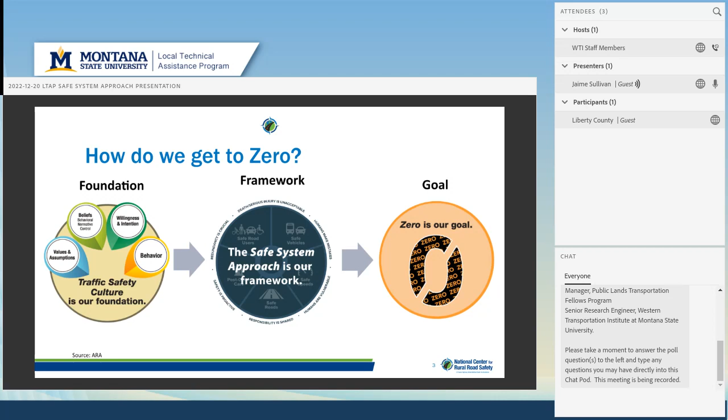In our case, the island would be our goal of zero. And our sailboat is going to be the safe system approach. That's how we're going to get there. But we can't do it without wind. And that wind is our traffic safety culture, and really making sure that we work on that as well. And so we'll go through each of these pieces.

And why is it important, and why have we been hearing this term safe system approach more recently? Well, this is because it's been done for quite a while internationally. And they're really finding that this approach is working, and it's helping international countries go towards that goal of zero. And so it's something that the United States has started to implement as well, knowing that it's working, and it's something that can help us get to our goal of zero.

We found that in January of 2022, this National Roadway Safety Strategy was released by the US DOT, and they talk about this crisis on our roadways and how it's unacceptable and preventable, and we really need to reach that goal of zero long term.

And so it also talks about US DOT's top priority being safety. And again, how they believe this should be done is through adopting the safe system approach. And so if you're interested, you can find this National Roadway Safety Strategy online. The very end of my webinar presentation will have a link for where you can find this. But you can read more there about what US DOT is doing to try and reach this goal of zero and use the safe system approach.

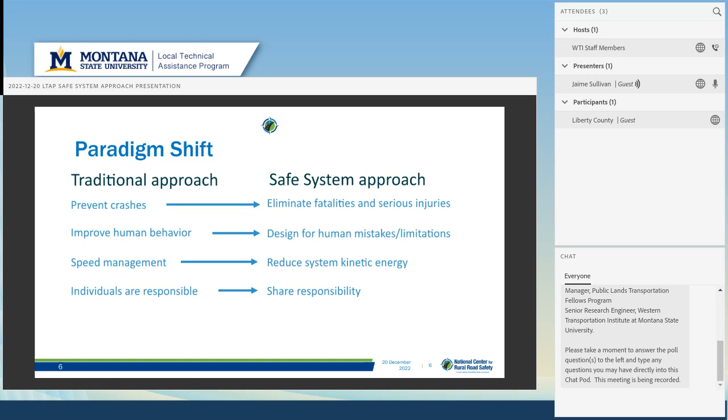Instead of trying to improve human behavior, now we're going to design for those human mistakes and limitations that I talked about. And we're going to talk a little bit about some of these human mistakes that occur and how we can do that. Instead of traditionally doing only speed management, now we're looking at how to reduce system kinetic energy. And we'll talk about what the definition of kinetic energy is and how that's different from just looking at speed. We used to say individuals were responsible for the crashes that were occurring in the traditional approach. And now we know it's really a shared responsibility. There's things that all of us can do to help prevent these fatalities, not just a driver.

And then we also used to look more at high crash locations and reactively applying countermeasures. And now we want to look at these proactively and really do a systemic approach where we know that if there's a particular location that has certain risk features, and another location in our county or area has those as well, it's just a matter of time before a crash is likely to occur at that one as well. And so we need to systemically apply these countermeasures.

Perhaps it's a horizontal curve where you have several of them in your county that look identical and crashes have only occurred at one of them. When you're putting countermeasures in there to make that curve safer, you want to do it at the other ones that look identical to it as well and have those same risk features to proactively make sure that no crash is going to occur there.

And then traditionally, we've really looked at transportation as the key to move efficiently. We wanted to get people as fast as we could from point A to point B. We wanted to move goods and services. And now in the safe system approach, we really want to look at it as safe mobility. So we do want people to be able to move between point A and point B, but we want to make sure that they're doing that in a safe manner versus really looking at efficiencies only.

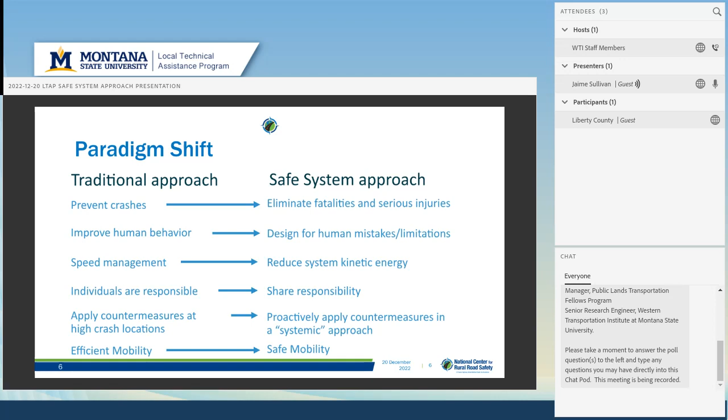So when we start looking at this safe system approach and digging into each of these pieces, we're going to look at it from two different perspectives. Around the outside of this circle, there are 6 principles, and we'll go into those individually and talk about each of these, but they're the pieces that really make the safe system work.

And then in the center, we see each of these elements, and these are where we can start putting some of the principles to place in each of these pieces. And you'll see that there's different people that tend to be responsible for each of these elements, but we can all work together to make sure that they are working in a holistic way.

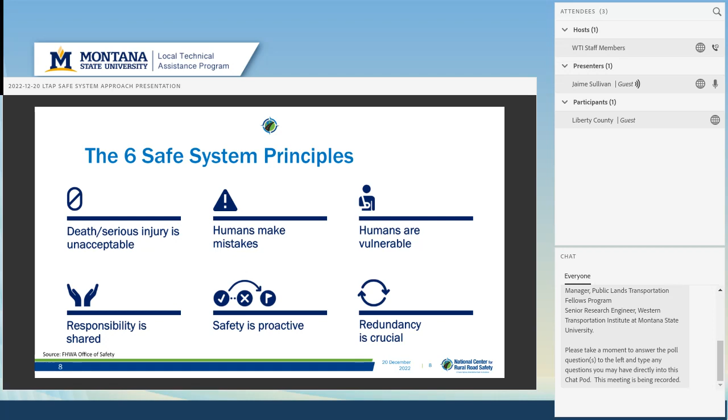So the six safe system principles that we'll go through. The first is that death and serious injury is unacceptable. This is where we talk about our vision zero and really making sure that we're getting to zero there. Humans make mistakes. Humans are vulnerable. Responsibility is shared. Safety is proactive, and redundancy is crucial. And again, we're going to go through each of these.

So for humans make mistakes, we really need to look about applying human factors when we're talking about redesigning roadways, when we're talking about some of the maintenance perspective that we do, and some of the things that we do when we're maintaining roadways, such as the retroreflectivity of our signs and our pavement markings, cutting back some of the foliage that's covering our signs and taking away some of those cues that we're trying to give to the road users.

So the system owners and operators should strive to make it easy for humans to not make mistakes by designing roads and vehicles to be in tune with human competencies. And what we know is that not all drivers are the same. Our capability as a driver or a road user is really our competence plus our human factors variables. And our competence are those things that we're born with, those abilities that we have, as well as our life experiences. So we see that as you get older, you have more life experiences and your capability improves.

But then we also see other things like those innate abilities. As you get older, some of those tend to degrade. So your eyesight tends to degrade, your reaction time tends to degrade. So really, when we're looking at human factors, we're looking at those youngest drivers have less life experiences, and those older drivers, their innate abilities that they're born with are starting to degrade. So we're going to look at both of those sides of the spectrum as we're trying to design things.

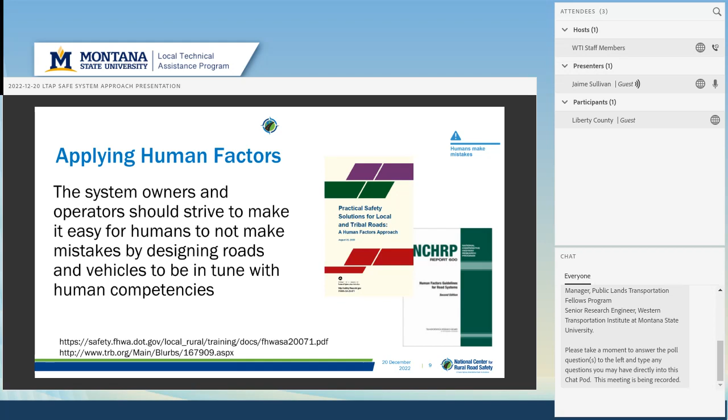We also then know those human factor variables are attitudes and behaviors. Those pieces such as thinking that it's okay to drive a certain amount of speed over the speed limit, or making the decision to get behind a wheel when you have had too much to drink. And so all of those pieces are things that we can consider.

We also know when we're starting to look at those human factor variables that there's an important piece of looking at what expectancies are for the human. We all expect certain things as we're driving or using a road. And so when things do not go as we are expecting or what we've seen in the past, then that's where issues can exist.

So such as driving that curve. If all of the curves that you've ever driven are very well marked, have the signs and the markings, and all of a sudden you come up against one that is not the way that you've seen in the past, that's when drivers and road users tend to make errors. And so that's why we want to make sure that everything that we can is as expected and that it is consistent.

We also know that humans are vulnerable, as we talked about before. So your body has a limited physical ability to tolerate a crash force before harm occurs. This is where things such as our seatbelts and our airbags are really important to try and keep those forces down so that you don't have as big of a risk for fatalities. So we also can use some of our ways that we operate and manage the roadways to also prevent those forces. And we can design safer roads that will help manage this kinetic energy.

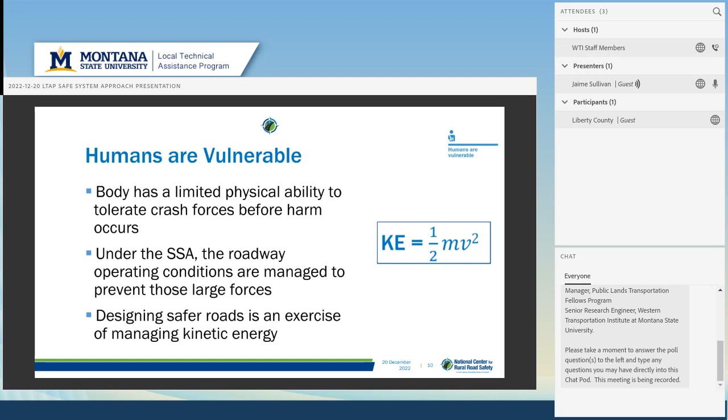We also want to create a more forgiving road system and know that the responsibility is really shared between everyone. So this is not just road users, but also managers of a road, maintenance staff, designers. We can all impact the road system and how it's forgiving. Vehicle manufacturers, which we'll talk about here in a little bit, post-crash care we'll also go into, and then law enforcement as they help us enforce some of those laws and the behavioral side of things as well.

We also know that safety needs to be proactive, which I talked a little bit about when we were talking about the horizontal curve. So some of the things that we can put into place in our holistic approach for processes include that systemic safety analysis where we're looking at our data and applying those countermeasures all across our county. We can also do things such as road safety audits, create local road safety plans. Again, I know that you have those in Montana.

And then also have safety coalitions where we can work with our partners in law enforcement and public health to make sure that not only are we implementing some of these countermeasures, but that we're also enforcing them and that we're educating the road users as to why they're important and why we put them in place.

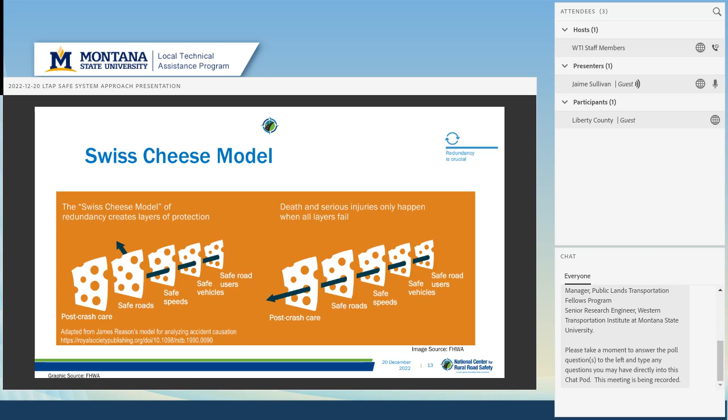And then the last piece in this would be our post-crash care piece. And hopefully at this point in the curve, they are in an area that has great cell service and we can get to post-crash care, or that there's enough people going around on this roadway that our EMS could be called, and perhaps our law enforcement has all been trained in traffic incident management as well and can get there very fast and take care of the crash. So each of these pieces is really important if we have multiples in here to help people.

So then we have these 5 elements in the center that I talked about. And again, we'll go through each of these in particular. So we have the safe road user element. And this is not just the attitudes and behaviors of the safe road user, but there's also things that we can do as engineers and planners and maintenance and construction to help with these as well.

And those include making sure that our roads are designed for all road users, using things such as the complete streets techniques, making sure that we try to separate our road users either by time or space. So making sure that those road users who are perhaps biking or walking or have disabilities are given their own portions of the roadway that they can use as well.

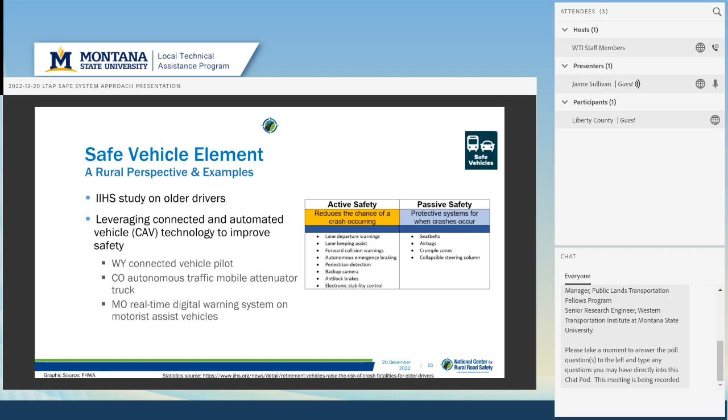And then we can also consider putting some of these safe vehicle pieces into our own fleets. So there are the connected and automated type technologies and some of these safety features that aren't even connected and automated that reduce the crash risk and the chances of crashes, and then have protective systems when crashes do occur. So when we're looking to put new trucks into our own fleet, considering which of these safety pieces we're going to look into and have and buy as well.

The safe speed element, this one is not about universally reducing speeds, but as we talked about before, it's really about designing to meet user expectancies, making sure that we are having these self-explaining roads, that it makes sense to a road user what they're supposed to do and how they're supposed to do it, and then self-enforcing roads as well, where it makes them go slower speeds based on the roadway.

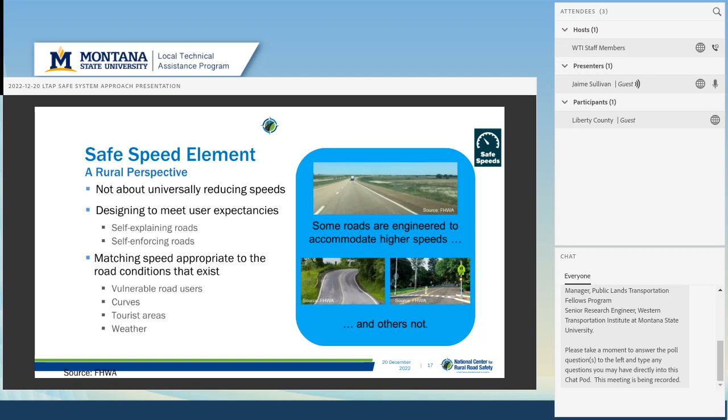We also need to make sure that our speeds are appropriate to what road conditions we have, whether this be the road users who are using the roads, whether it be the fact that we have curves or unpaved roads, so what our road is made up of. But then also those ones where we have a lot of tourists in our areas, especially in Montana. And then the weather as well is an important factor. So speeds need to decrease when we have the bad weather as well.

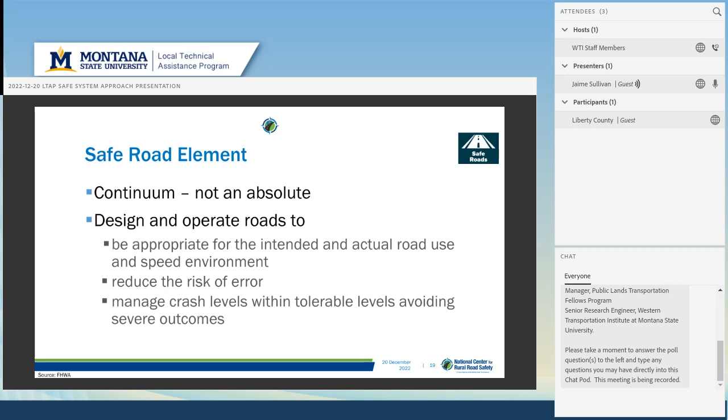For the safe road element, this is going to be a continuum. It's not an absolute. It's something that we're going to have to continuously work towards and continuously change because the design and operation of our roads can also change. So we need to make sure that we're updating the safety countermeasures that we put into place as the design and operation of our roads change too. So it needs to be appropriate for our intended and actual use and speed of the environment. We're trying to reduce really that risk of error for people and then manage those crash levels to tolerable levels to avoid those severe outcomes such as fatalities.

And we can do this by using our proven countermeasures that Federal Highway has. NHTSA also has those countermeasures that work on the behavioral side. And then Road to Zero has put together a website on doubling down on what works. We also have the Focus on Reducing Rural Roadway Departures group, who has put together several guides that help with the rural roadway departures as well.

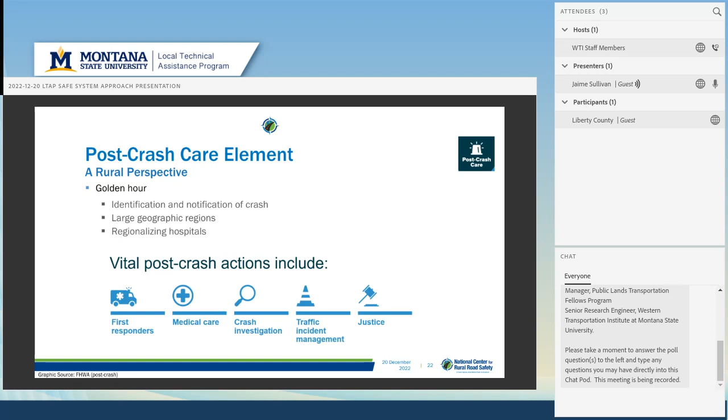And then that last piece that we talked about is that post-crash care element. The golden hour is very important to make sure that we can get to people in that first hour after a crash occurs. And that's really where the risk of a fatality goes down, is if we can get to them. So it's really important that we do things such as take those traffic incident management trainings that exist. And there's a new one that's going to be coming out for rural here within the next couple of months. So I hope that you'll all explore that when it is available through Federal Highway Administration.

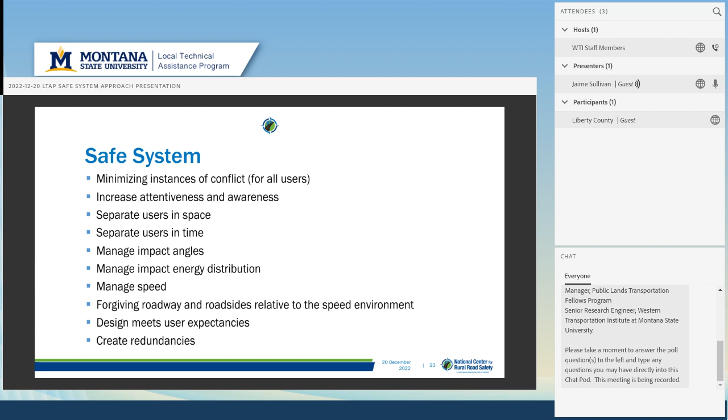So just to wrap up, our safe system, to create that, we need to minimize our instances of conflicts for all road users, not just the drivers. Make sure we're increasing attentiveness and awareness of road users, separating our users in space and in time, managing those impact angles, the energy distribution, and the speed. Make sure that we have forgiving roadways and roadsides relative to that speed environment. So if you do have a roadway departure, making sure that we have a clear zone and that we have barriers up for things that could be hit, or have the posts that can break away, making sure that we're designing based on users' expectancies and then creating those redundancies.